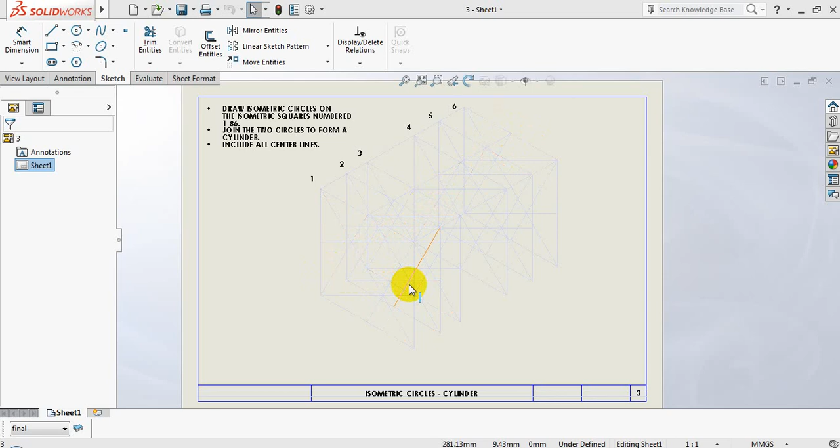Hi guys, we are still busy with isometric circles. We're on page 3, and in front of you you will see a whole lot of lines that might confuse you. I've constructed all these isometric squares with the construction of isometric circles, but I have not included the isometric circles, and I'd like to see that you will be able to successfully construct your own isometric circle on the said number isometric square. So let's have a look.

How will we go about this? In the question or the instruction, it says draw an isometric circle on the isometric squares numbered 1 and 6. The isometric square for number 1 will be this one over here. And we'll have number 6, which will be the very last one. So we'll be drawing our isometric circles within these two isometric squares. The trick here is going to see whether you can find the correct construction lines, use the correct interception points, and draw the correct arcs.

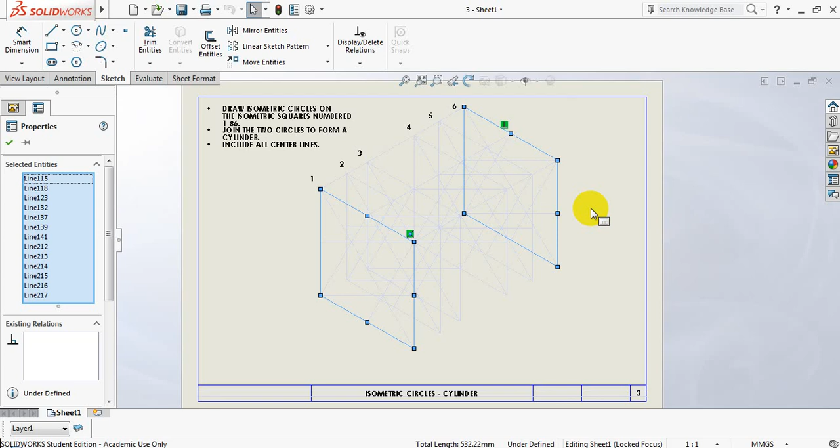Now if I look carefully over here, I have an intersection point from my obtuse to opposite center. So I'm going to be using this line here, and my obtuse to opposite center over there as well. Somewhere on this line, I will be putting my compass point to draw my first arc. Now my opposite obtuse angle will be this one here. If I'm going to be following that line over there, that's going to give me my obtuse to opposite center. And I'm also going to be finding that this is my obtuse to opposite center. Remember, I'm only focusing within the isometric square for number 1. So don't worry about these lines coming out over here.

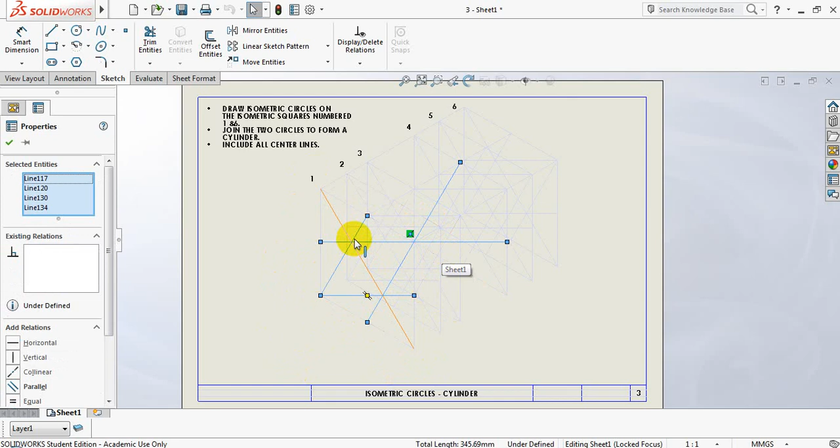Right, so I found my intersection points. I'm going to be using my arc tool, and I'm going to be pinpointing on the intersection point, opening up to the very perimeter and scribing my arc from that intersection point. Let's see if I have this correct. I will be using this intersection point over here. This is going to be the test for you guys to see whether you understand the actual construction of an isometric circle and whether you can find the correct points to work from.

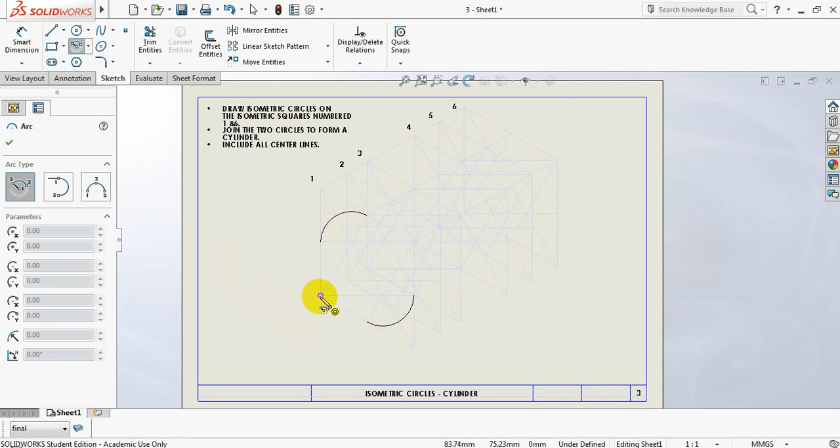Right, I've got my first two arcs. I can already see where I'm going with this. I'm obviously going to be using my obtuse angle and joining the two sides on that end from there to there. Let me quickly find. There we go. And I'm going to be using that obtuse angle, joining that point over there to this point over here. Right, I've got the very first one.

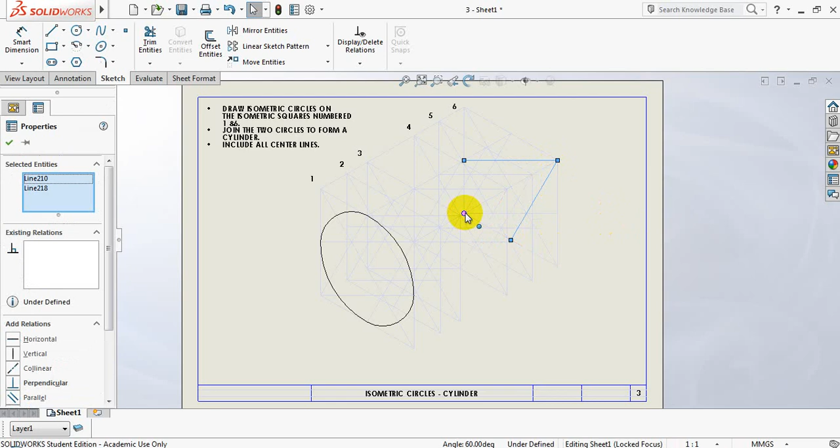I also need number 6. So I'm going to need to focus. I'm going to look from my obtuse angle, find the two V's from my obtuse angle. There's one. This is going to be my next obtuse angle. And the V's from that obtuse angle will be those two. Remember, it goes from obtuse to opposite center of the opposite line. Obtuse to opposite center. Please use your 30-degree set square to find exactly which line you're going to be using.

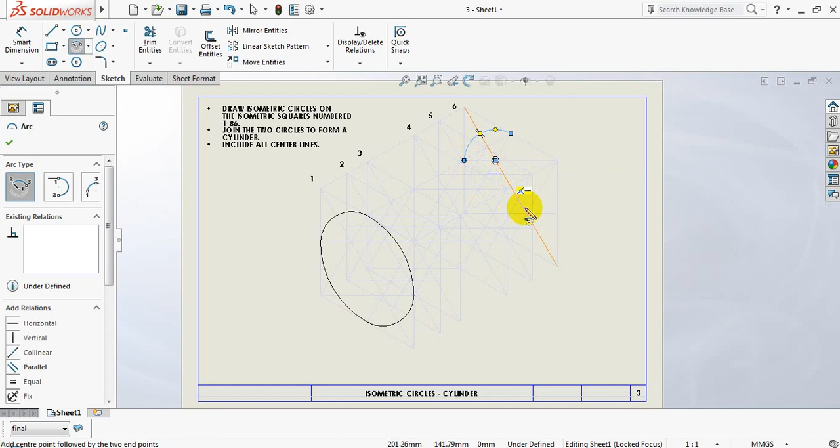Now that I have those 2 points, I'm going to be using the arc tool of SolidWorks. I'm going to find my intersection point, open my compass, and simply scribe my arc from and to. I'm going to go to my second point. A little bit of focus needed here. From and to.

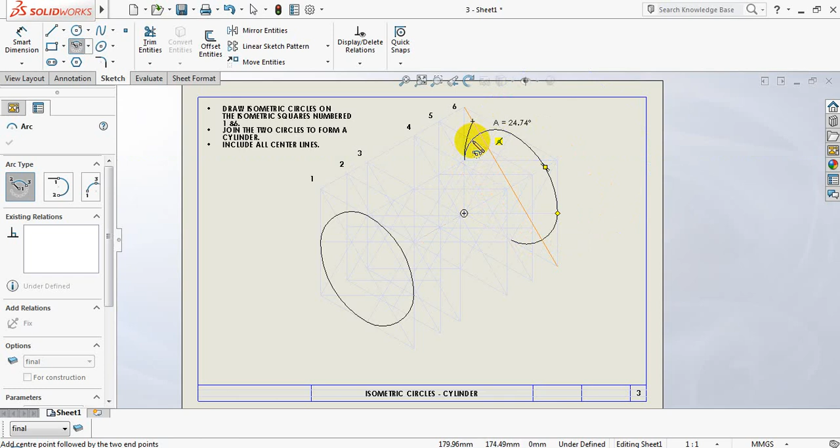There we go. Right, I'm going to use my arc tool again. I'm going to follow up on this line over here. That is obviously my obtuse angle. I'm going to open it up so that I can join this point to that point. And this is the next obtuse angle I'm going to need to use. From this point... sometimes it's a little tricky to get SolidWorks to go in the right direction, but there we go. Right, we've managed to get two isometric circles drawn on isometric square 1 and isometric square 6.

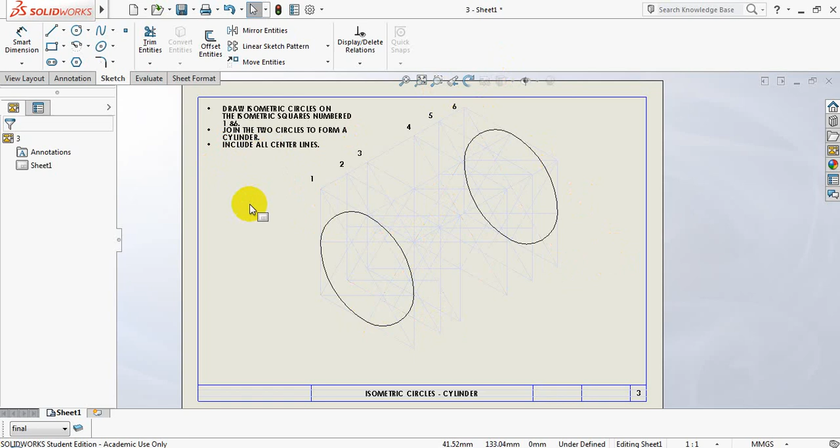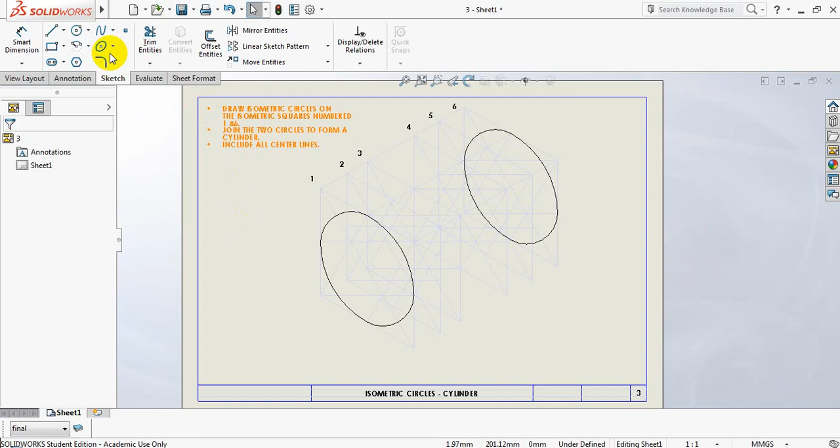They say include all center lines. You'll obviously include your center lines according to how you've been taught. And then there's one little instruction in the middle here that says join the two circles to form a cylinder. We know that two isometric circles can stand alone, but if we simply join the two circles with two lines at a tangent of the two circles, we'll be able to form a cylinder. Let's see how we go about doing this. I'll go to my line tool.

You'll notice that there is the longest line that you can draw from an acute angle to the acute angle. If I had to draw a line from obtuse angle to obtuse angle, it still wouldn't be as long as this line over here. Therefore, we'll always be drawing or constructing a line from acute angle to acute angle in isometric square number 1 and for isometric square number 6.

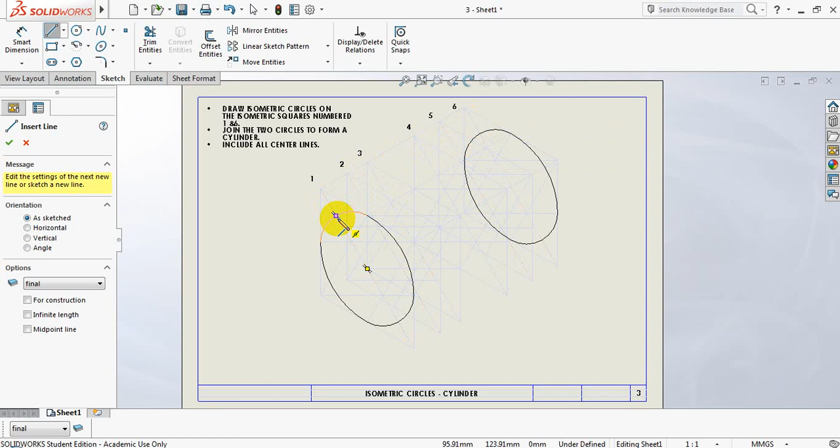Where this line touches the actual arc, you'll notice at that point there, I will take that point, click and draw a line to where that longest line touches the arc of the isometric circle in isometric square number 6. Already you can see the actual cylinder taking shape. I'm going to do the same over here.

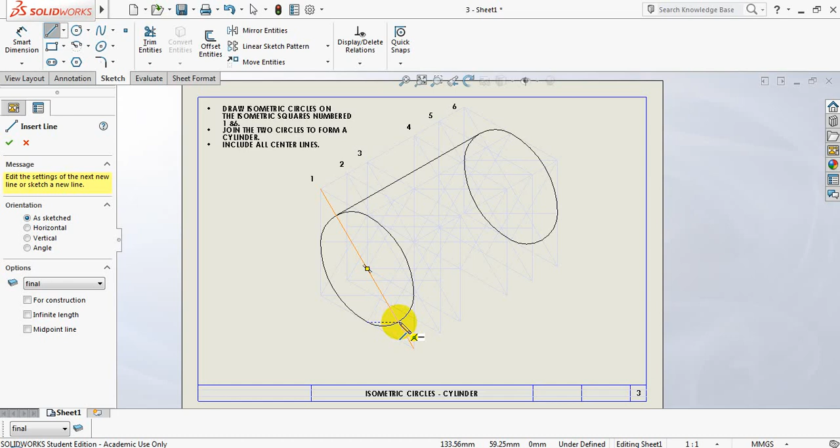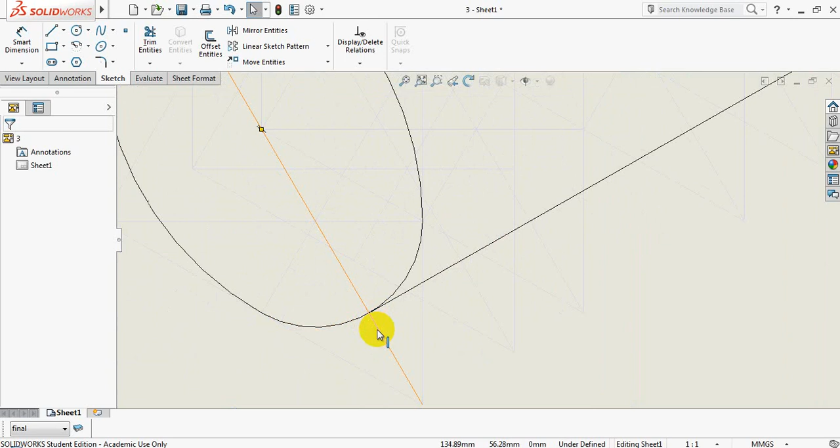Notice, I'm going to zoom in on this fact over here: where that longest line touches the arc, that is where you will be lining up your ruler or your 30-degree set square, and you'll be joining this circle to this circle where that line also touches the arc. Right, that seems simple enough. Having two lines drawn, I could make two separate circles look like a cylinder. Yet there is something wrong with this.

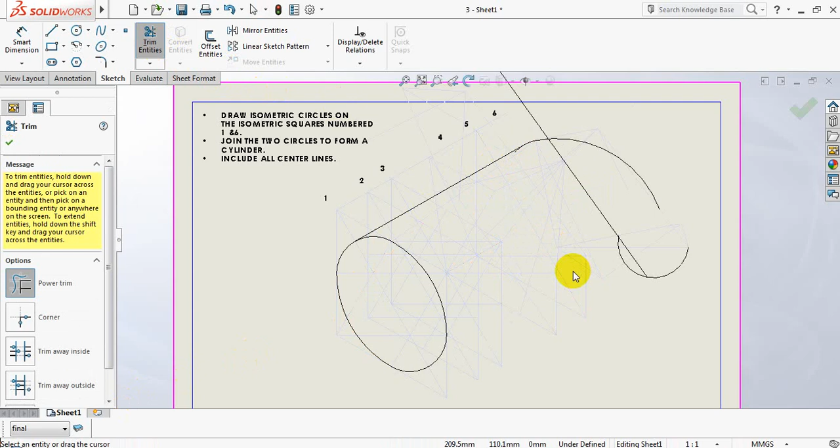We're obviously not going to be seeing these lines, so we could delete them. I'm going to be using a trimming tool. Oh dear. And there we go. This was page 3, isometric circles and how to create a cylinder using two separate isometric circles, joining them with two lines. Thank you for joining me.